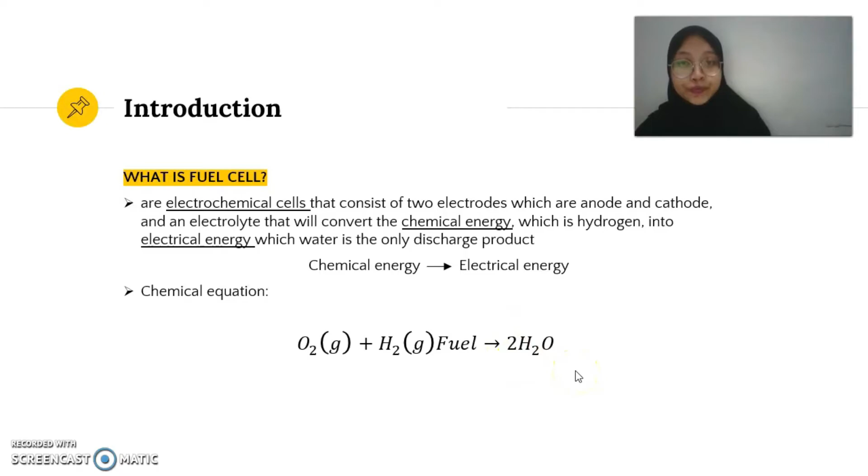So moving on to the history of fuel cell. In 1839, fuel cell was first discovered by Sir William Grove when he found out that electricity can be generated by reversing the electrolysis of water. Then in 1932, Francis Bacon successfully developed the first fuel cell device by using oxygen, hydrogen, alkaline electrolytes and nickel electrodes. Then this revolution was followed by NASA when they developed an electrical generator for the space program.

Then for the types of fuel cell, fuel cells are classified by the types of electrolytes that they use, and these are the examples of types of fuel cell, which are alkaline fuel cell, phosphoric acid, solid oxide, molten carbonate, and proton exchange membrane fuel cell. And there are many other types of fuel cell already in the market.

So for fuel cell in Japan, Japan is one of the countries actively developing hydrogen energy. As for now, Japan is in the third wave of hydrogen, which started around 2015; the first wave was around the 1990s, and the second wave was during the early 2000s. In the 1990s, Japan had limited domestic energy sources, so they made a deliberate choice to develop a hydrogen-based society. In the 2000s, the Japanese government and industries gave more focus on popularizing and promoting fuel cell vehicles with a view to improve the effectiveness of hydrogen refueling stations.

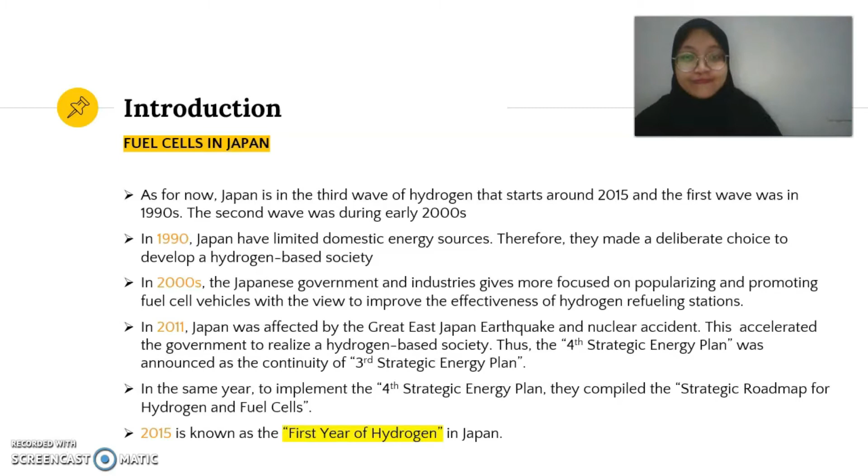I will explain about the advantages of fuel cells. Fuel cells can give protection for climate and energy security by taking a leading role in meeting national goals of clean air, and can reduce carbon dioxide emissions. Next, they can obtain 80% efficiency compared to traditional resources because they are not affected by limitations derived from the Carnot thermal cycle. And they can produce electricity without combustion, with low vibration, noise, and low maintenance required.

Next, sources of hydrogen fuel are everywhere, for example landfill gas, biomass, ethanol, methanol, natural gas, propane. And lastly, low maintenance because on site they can locate and substitute damaged or malfunctioning cells.

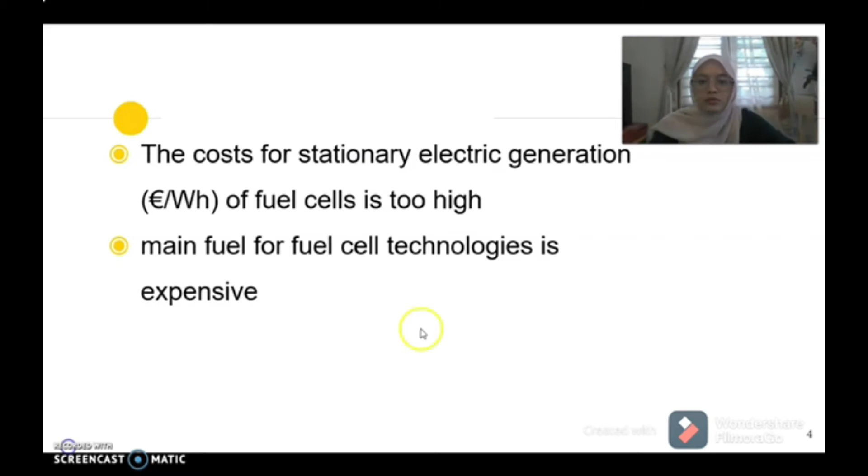The disadvantages of fuel cells. The cost for stationary electric generation of fuel cells is too high and not suitable for the substitution of technologies based on fossil fuels. Next, as hydrogen is the main fuel for fuel cell technologies, it is expensive and not easy for production and distribution. Next, it is limited to use for low temperature fuel cells in the car market due to the difficulties in confining a suitable quantity of hydrogen.

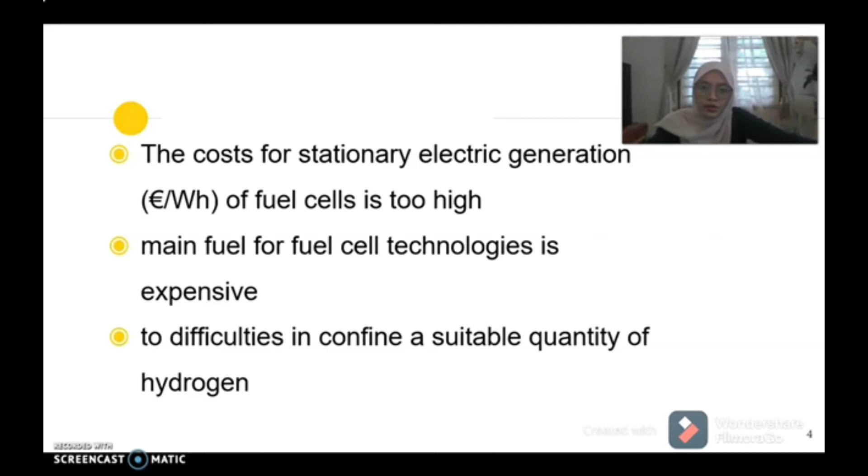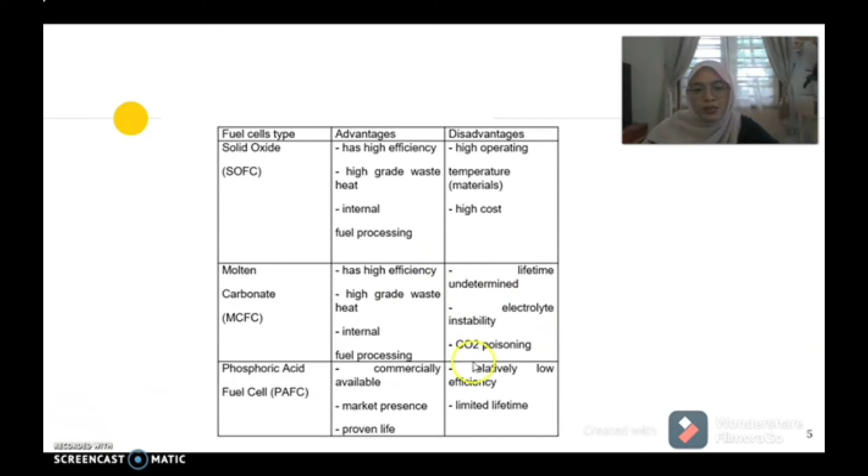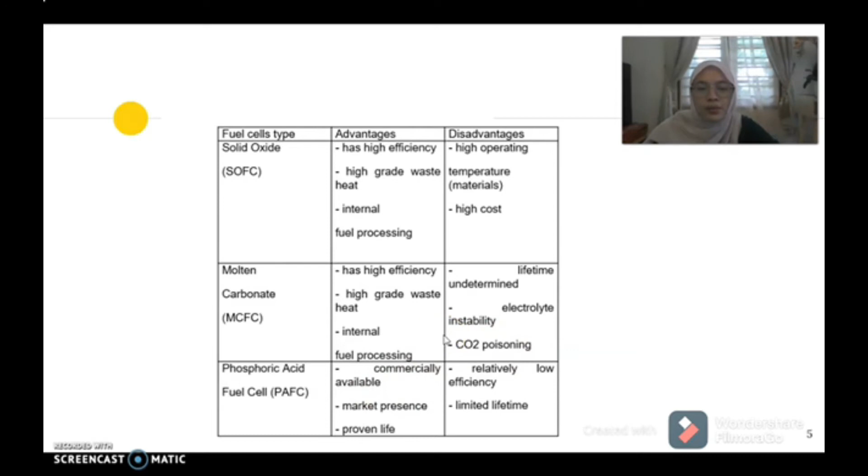There are a few types of fuel cells, which are solid oxide, molten carbonate, and phosphoric acid fuel cells. The advantage of SOFC is high efficiency, but the disadvantage of SOFC is high cost. Next, MCFC has high efficiency, but the carbon dioxide product is poisoning, and PAFC is commercially available, but it has limited lifetime.

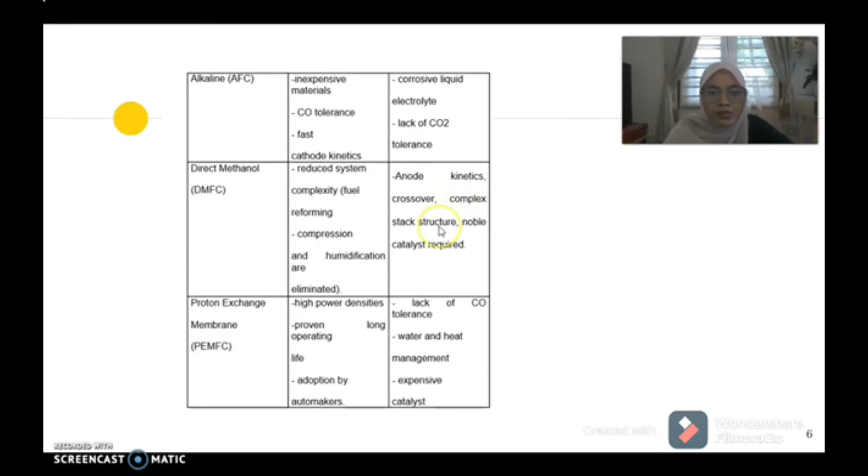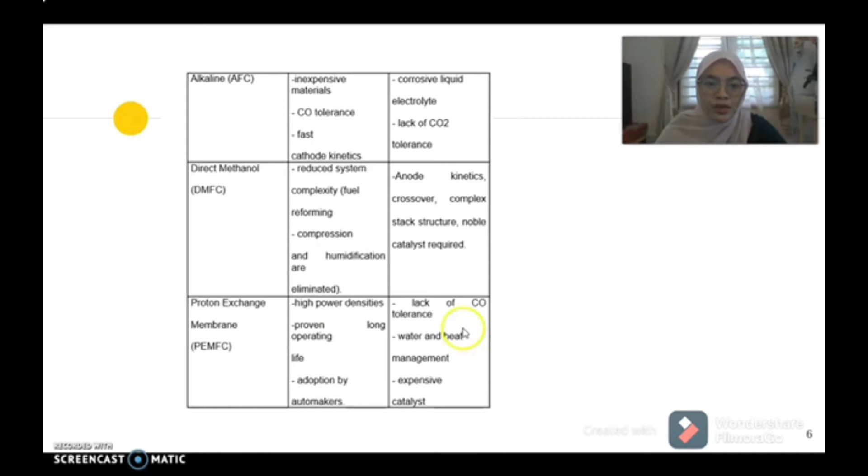Then the alkaline fuel cell uses inexpensive materials, but it lacks carbon dioxide tolerance. Then DMFC can reduce system complexity, such as fuel reforming, but DMFC has issues with anode kinetics, crossover, complex stack structure, and noble catalyst. Lastly, proton exchange membrane fuel cell has high power densities but lacks carbon monoxide tolerance.

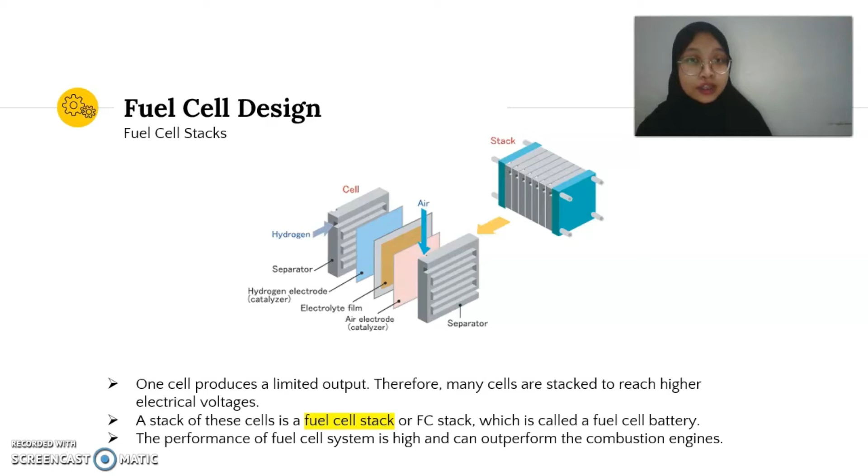So for fuel cell design, we will discuss the fuel cell stacks. As you can see in the picture, one cell produces a limited output, so it is necessary to stack the cells together to reach a higher electrical voltage. A stack of these cells is called a fuel cell stack, or also called a fuel cell battery. And in principle, the performance of a fuel cell system is high and it can outperform combustion engines.

So there are four parts of fuel cells, which are anode, cathode, electrolyte, and catalyst. Anode is the negative pole of the fuel cell. It conducts the electrons that are freed from the hydrogen molecules so that they can be used in an external circuit. Cathode is the positive pole of the fuel cell. The channels distribute oxygen to the surface of the catalyst, and it conducts the electrons back from the external circuit to the catalyst. Then they recombine with the hydrogen ions and oxygen to form water.

Then the electrolyte is the proton exchange membrane, and it only conducts positively charged ions, and the membrane will block the electrons. Lastly is the catalyst. The commonly used catalyst is platinum powder very thinly coated onto carbon paper or cloth, and it is a special material that will facilitate the reaction of oxygen and hydrogen.

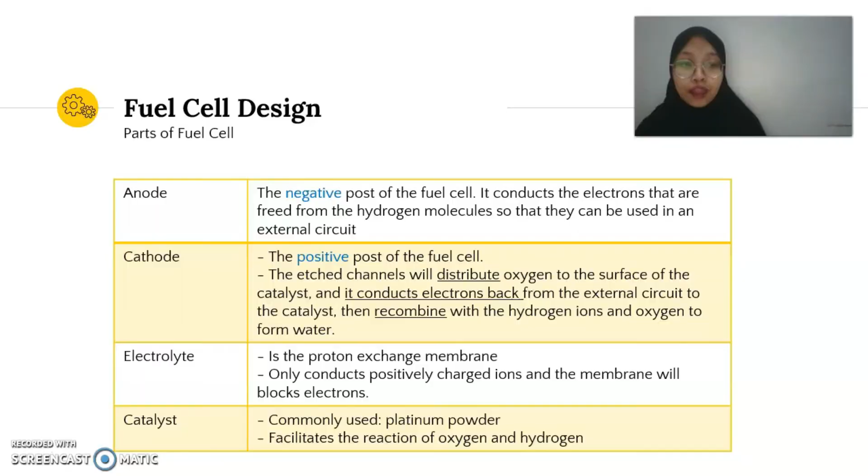Now I'm going to explain about the fuel cell operation in Japan. So, same as other fuel cells, the methods are generally the same. The fuel cell consists of two electrodes, the positive one known as cathode and the negative one known as anode. The electrodes are both sandwiched by an electrolyte. The fuel used is hydrogen fed to the anode and the air is fed to the cathode.

The function of the catalyst is to separate hydrogen molecules into protons and electrons, which then take different paths to the cathode. Then the electrons go through an external circuit, creating a flow of electricity. The protons then reunite with oxygen that passes through the electrolyte to the cathode, and the electrons to produce heat and water.

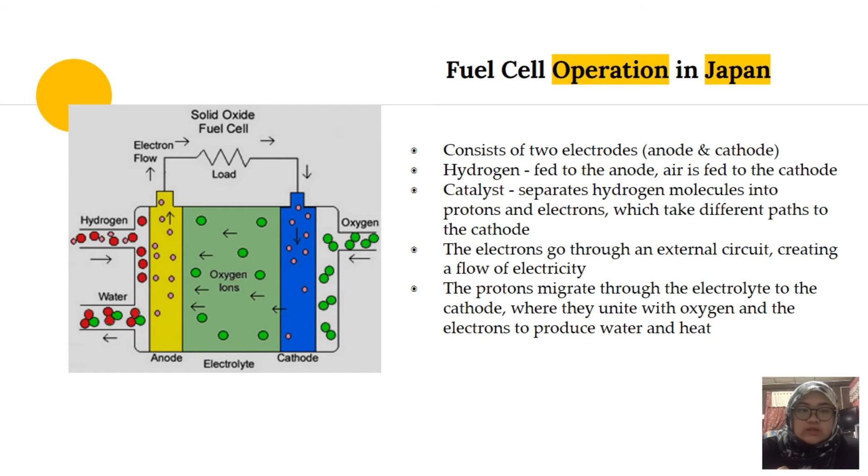The calculations that may be involved in fuel cells are current density, volts per cell, power per cell, number of cells needed, total current, total voltage, and total power. For current density, the formula is J equal to IFC divided by area of cell, and the volts per cell depends on the table of polarization curve between current density and volts per cell. Power per cell is equal to current density multiplied by active area size and multiplied by volts per cell.

And number of cells needed can be calculated by design power divided by power per cell. Then the current is active area multiplied by the current density. The total voltage can be obtained by multiplying the volts per cell and number of cells. Lastly, the total power can be obtained by multiplying the total current and total voltage.

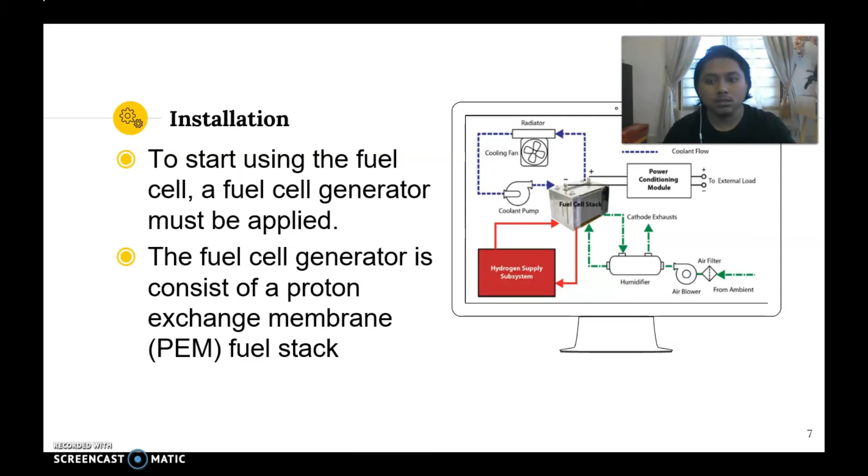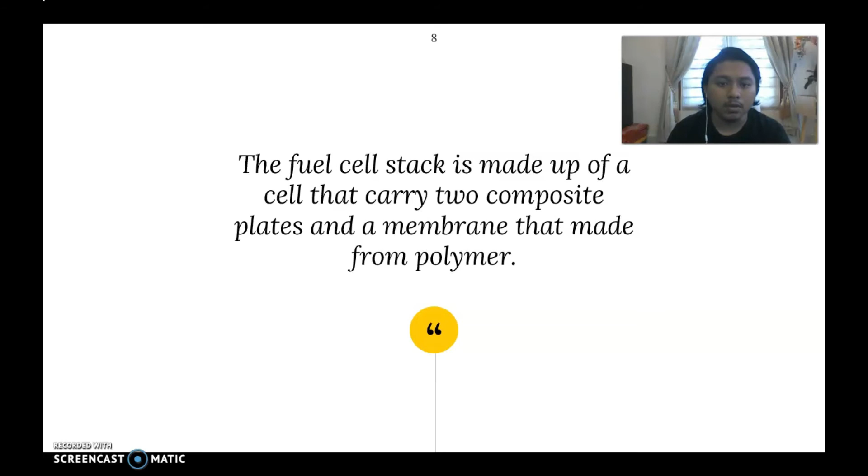So to start using the fuel cell, a fuel cell generator must be applied. The fuel cell generator consists of a proton exchange membrane, PEM, fuel cell with 4 basic subsystems, including the airflow subsystem, the cooling subsystem, the power conditioning subsystem, and the hydrogen supply subsystem. So the fuel cell stack is made up of a cell that carries 2 composite plates and a membrane made from polymer, with the help of 4 subsystems.

The first one is the airflow subsystem. It is to supply filtered chilled air into the fuel cell stack. It consists of the cathode air filter, the cathode air blower, and the humidifier. The cathode air filter is to remove explosive gas and contamination from the air using chemical absorption. The cathode air blower is used to suck the air into the fuel stack. The humidifier is to transfer the heat and humidity to the inlet air stream from the fuel cell stack.

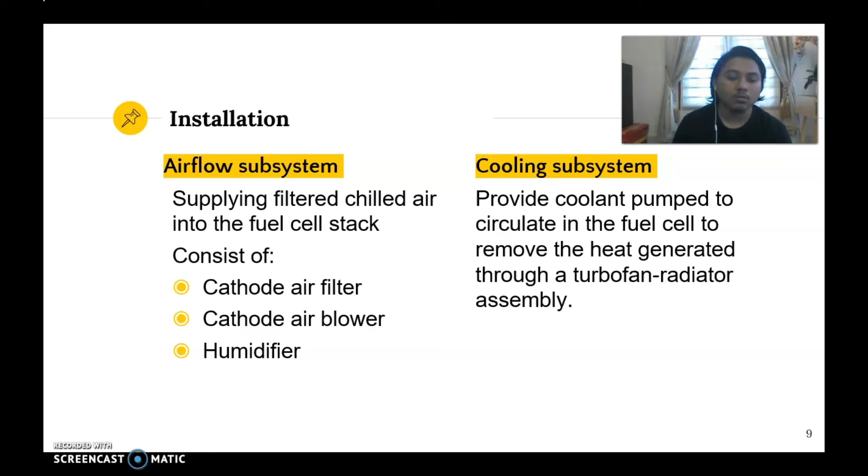So the second one is the cooling subsystem. It is to provide coolant pumped to circulate in the fuel cell to remove the heat generated through a turbofan radiator assembly. So the third one is the power conditioning subsystem. This subsystem provides the proper interlinking between the stack power and the external load. When there is high power demand on the external load, the stack power is boosted and the battery discharged to add extra power to the DC bus. When there is low power demand on the external load, the battery is charged by the power converter using extra stack power.

So the last one is the hydrogen supply subsystem. It is to supply the hydrogen fuel into the fuel cell to generate electric power.